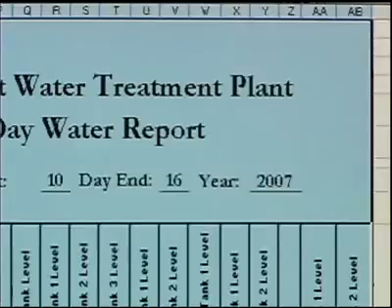Some of the challenges in developing this new facility included the need to integrate an existing pumping station, expansion to include another 20 pumping stations, and the ability to communicate with existing PLCs from multiple manufacturers. After analyzing the plant's needs, specifications, and future expansion plans, Wonderware Canada East and Canadian system integrator Automation Now recommended a SCADA software solution from Wonderware.

In selecting Wonderware as the SCADA solution for this project, we had to look not only at the scope of the original project, but also the expansion in the future to be able to communicate to 20 remote sites that had different PLC manufacturers and communication protocols that we had to achieve.

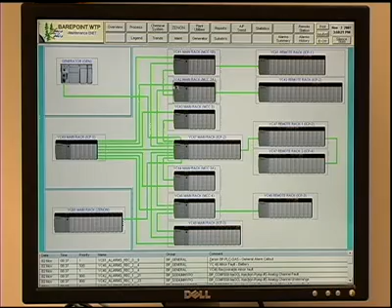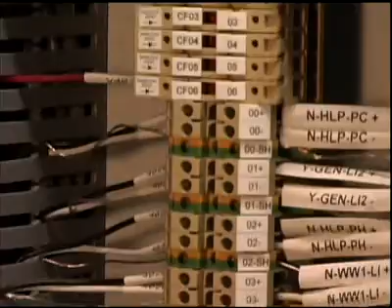Wonderware had the versatility not only to communicate with the 12 PLCs locally in this facility, but had the capabilities to talk to multiple PLC manufacturers over different protocols for the entire scope of the project in the future.

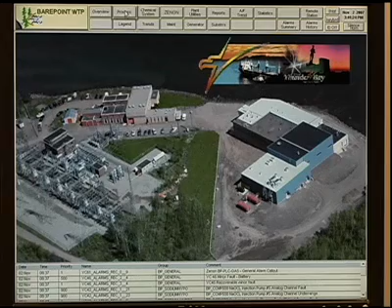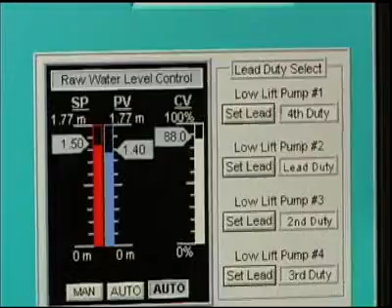We've recently expanded our Bare Point water treatment facility from a 14 million gallon a day direct filtration facility to a 25 million gallon a day ultrafiltration plant. Part of the expansion was using SCADA software, and the choice was Wonderware. Our operators found that very easy to use, and thus we standardized on that product. With the standardization came the implementation of this software for 20 of our remote pumping stations.

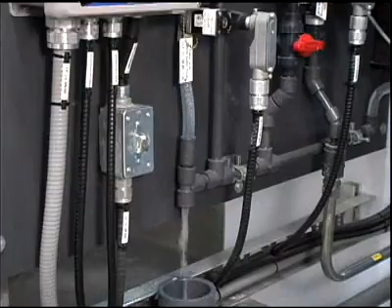Throughout the plant, at every step of the process, water quality is being monitored, and Wonderware software is an integral part of the process. Since we started up the new Bare Point Water Treatment Facility, Wonderware software has been an amazing tool, especially for me being the process engineer at the plant.

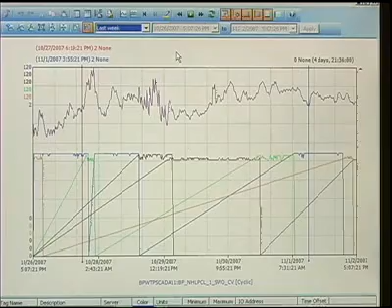We use Active Factory for trending analysis, and I can make customized trends for operations. It's very easy to use. I'm able to pull whatever parameters I need into one trend and see how they're related in the process, and make better informed decisions about the process.

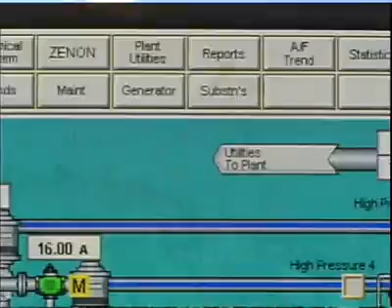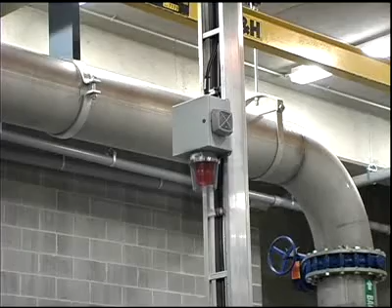Wonderware's SCADAlarm software is an indispensable tool for the plant operators. Since Barepoint is supplying the city's drinking water, it's imperative that all analytical equipment be continuously monitored. If an instrument takes a reading that's out of a predetermined range, an alarm will sound and the operator is notified, both on the SCADAlarm screen and a plant-wide alarm system, in case the operator is away from the control room.

Because of Wonderware software's legendary easy-to-use and intuitive interface, system integrators from Automation Now are able to realize ongoing efficiencies as the system expands. I think my favorite part of Wonderware would be the ease of use.

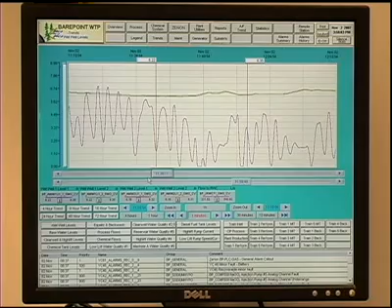Having everything clearly defined on a screen in front of you, it's all there, it's at your fingertips. Whether you want to look at trending, turn a pump off and on, or see what your chemical dosages are, it's all there, easy to look at, easy to use. Wonderware just makes it so simple.

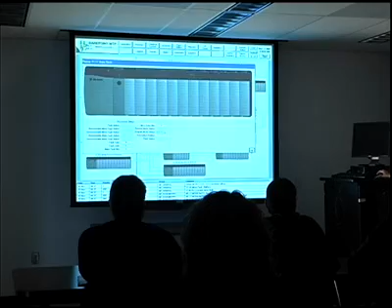One of the unique features of Barepoint is the dedicated training facility. Instructors can project a live view of the facility and make adjustments to the process in real time. This provides a great environment for learning, and the same space can be used for group analysis and troubleshooting. If you're with a group of people, it's nice to put it up on a big screen, transfer all the data from the operator's screen, and watch the whole process live online. Wonderware makes that simple.

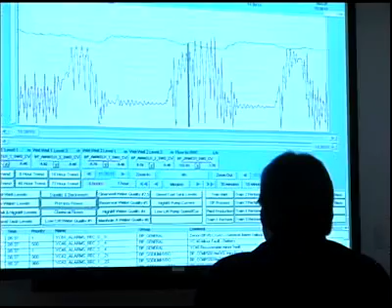Barepoint's operation is controlled by a Microsoft Windows system utilizing Wonderware terminal services to run the entire plant. Redundant servers with UPS backup systems log over 5,000 points of data 24 hours a day, 7 days a week.

On the network side, redundant switches and redundant fiber optics talk DeviceNet to 10 PLCs in the field. Once this information reaches the network closet, it gets routed into the I/O servers. All that information goes into the SCADA system, providing real-time data acquisition as well as controlling the plant through operator terminals in the control room.

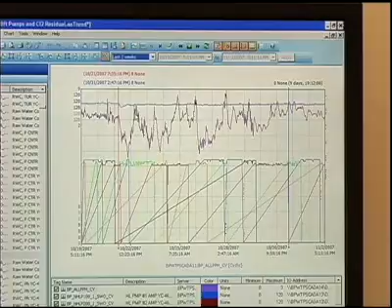For me, the strength of the Wonderware system is the trending package and the data collection. I'm very pleased with how I can collect whatever data point I want to hone in on a certain process and figure out exactly what's going on there. And if a pump's about to fail or something's going on, I can pick that up.

Outside the facility, the process begins when water from Lake Superior enters the intake chamber in the old building through 3 raw water intakes. Traveling screens filter out any solid lake debris that could cause damage to the filtration plant.

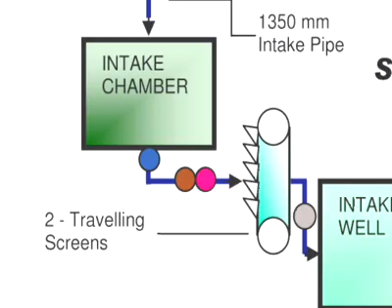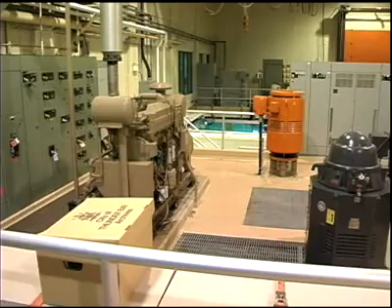Analytical equipment measures the pH, turbidity, particle counts, and chlorine residual of the raw water as it enters the wet well. Each of Barepoint's 4 wet wells has a total daily pumping capacity of 27 million gallons.

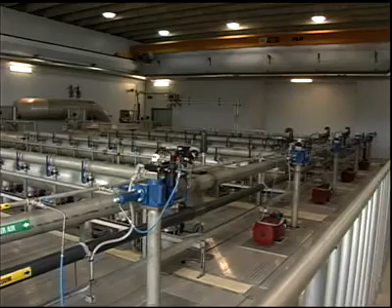The water is then pumped to the filtration building next door. In order to protect the staff from Thunder Bay's sub-freezing winters, workers travel from one building to another via an underground tunnel. As water flows through the facility, Wonderware InTouch software is utilized to operate a series of pumps and control valves as the water makes its way to the ultrafiltration membrane room.

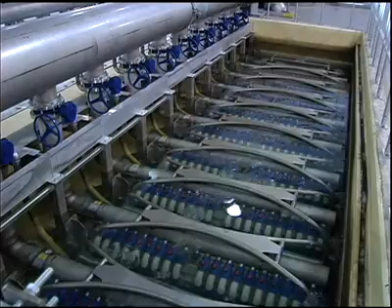This is where Wonderware's graphical interface is particularly effective. With the ultrafiltration trains on a backwash cycle, there is a representation of the bubbles and the aeration throughout each of the filters. On the Wonderware screen, the operator gets a representation of exactly the bubbles, the tank drain, and the levels of that process.

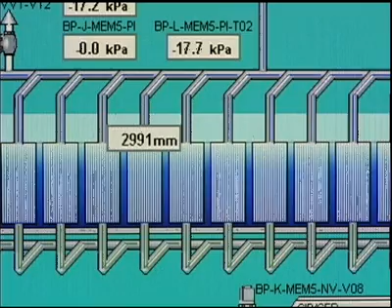The Wonderware software is an incredible tool for the operators. They can stay in a central location in the control room, monitor all the plant processes and all the analytical equipment, and really have a good idea what's going on in the plant without actually having to leave the central control room. There's also SCADA terminals all over the plant, so if the operator does have to go out and check something, he can still view the processes from out in the field.

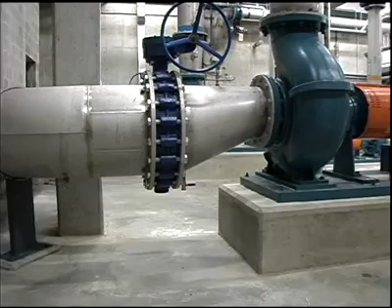All the analytical equipment is on these screens, so at any one time I can go to the start of the process, find out what our raw water quality is, and then go to the end of the process and see how good the drinking water is going out of this plant.

The installation at Bare Point Water Treatment Facility was so well implemented that it was voted Best HMI SCADA Application at the 2006 Wonderware Open. Whether you've been working with Wonderware for 1 day or 1 year, the ease of use is the same for everyone. That gets everyone on the same page at the same time really fast, and that's important when you want to increase efficiency and run your plant to the best that you can.

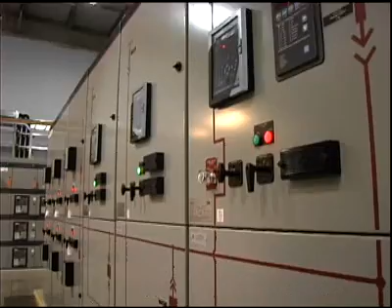Thunder Bay's Bare Point Water Treatment Plant is the first ZeeWeed 1000 version 3 plant of its kind in the world. With a combination of existing equipment, a new state-of-the-art filtration system, and PLCs from multiple manufacturers, it all comes together at Thunder Bay with a little help from Wonderware.